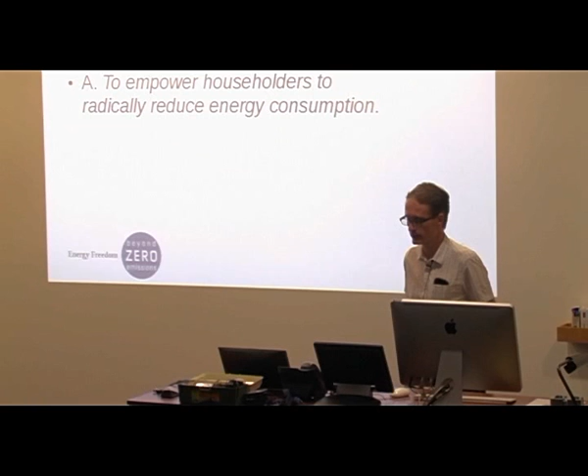We want to talk about energy freedom. First, let's consider why energy freedom. It's to empower householders to radically reduce their energy consumption.

And where does the idea of energy freedom come from? Well, it stems from the Zero Carbon Australia Buildings Plan, which was launched in late 2013. And I was lucky enough to be a contributor to that plan.

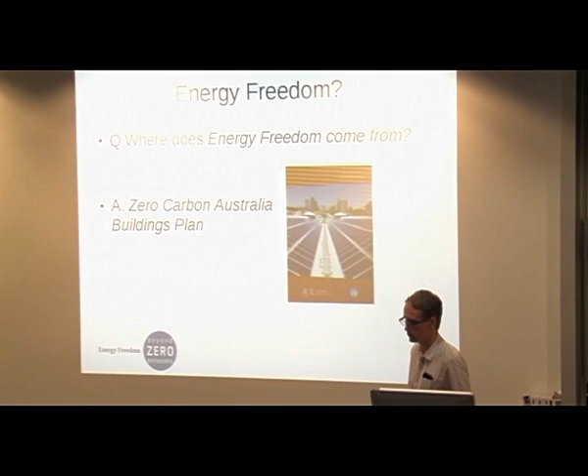In a big part, this idea of energy freedom challenges the idea of normal in terms of what I envisage as the normal householder. So I just tried to encapsulate this idea of a normal householder's attitude to energy by framing a couple of statements by a hypothetical normal householder.

A normal householder might say: I can't do much about my energy consumption, or my energy bills are largely outside of my control. Energy is something I buy from a big company. I don't really care where my energy comes from. I'll wait till I renovate, or I'll wait till I buy, to fix problem X. And lastly, of course I use gas. They're the sorts of things that a normal, hypothetical householder might say.

So, what is energy freedom? I've tried to distill it down to 6 words: net zero energy, no fossil fuels. I think that sums it up, but it may need some explanation.

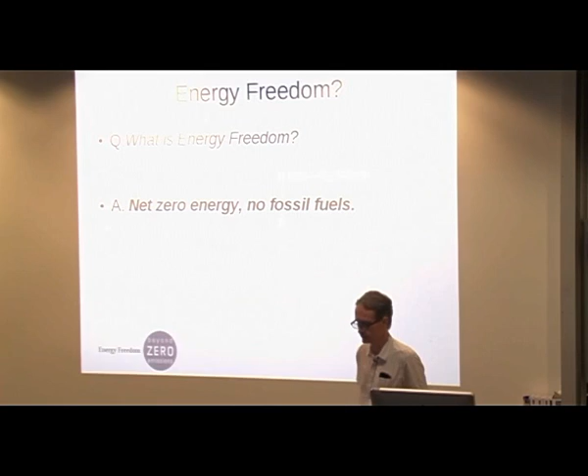Net zero energy - hopefully most of you are comfortable with the idea, but let's just be clear. A house achieves net zero energy when its annual energy consumption equals its annual energy generation. In that regard, solar PV is a game changer, because our hypothetical normal household doesn't generate any power. Until now, it might have seemed like achieving net zero was outside the realms of feasibility for most households.

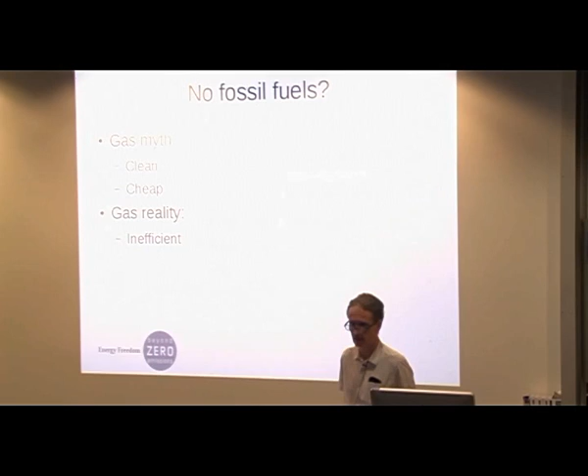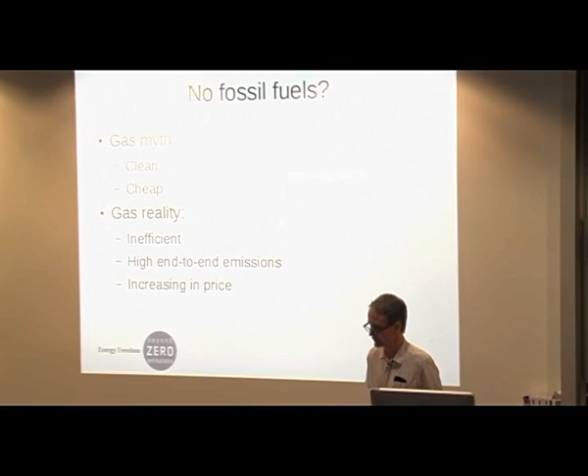The other flip side of that definition of energy freedom is no fossil fuels, which largely means no gas. The gas myth is that it is cheap and that it is clean. In my research, I consider that the reality of gas is that it is not efficient, or not as efficient as it could be. It really does involve high end-to-end emissions, and that it is increasing in price. So the reality and the myth about the use of gas in homes are quite different.

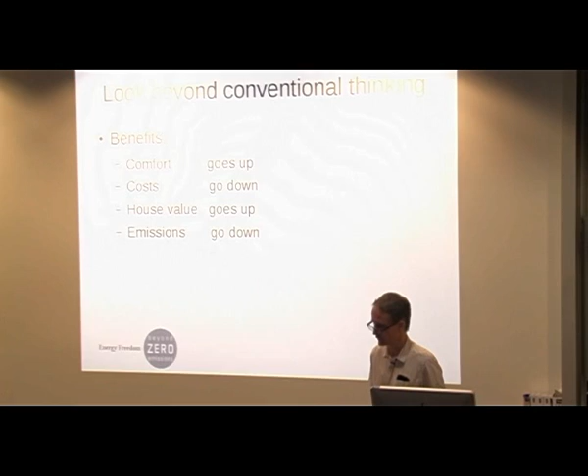To a large part, embracing energy freedom is to look beyond conventional thinking. The benefits of which are that comfort goes up, costs go down, house value goes up, emissions go down. And the other side of the coin in looking beyond conventional thinking is that money spent in achieving energy freedom is an investment, not an expense.

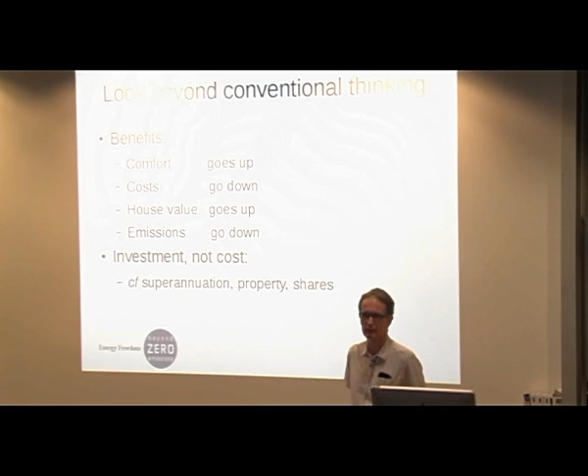Investment, not a cost. So framing this in terms of a valuable investment, like the same mindset you might apply to your superannuation or to investing in shares or investing in property. Investing in the value of the energy performance of your house is real and tangible.

So what's the context in which we are principally applying energy freedom? Well, our main target audience is firstly for existing homes and principally for owner-occupiers. That's not to say that these ideas don't have broader application, but we see the main potential for this approach to make a huge difference in this country is for those people who have their own home and can transform it radically.

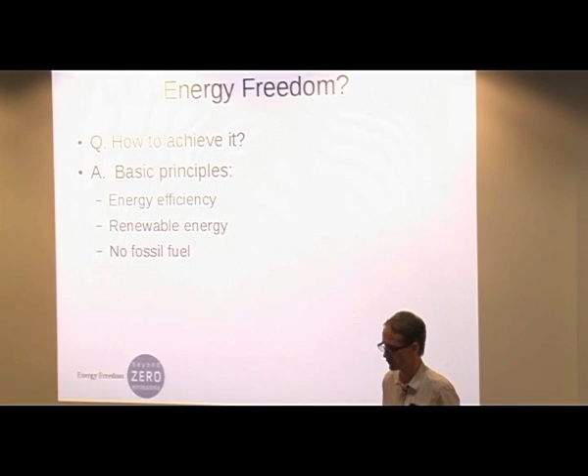Okay, how to achieve it? The basic principles of applying energy freedom are energy efficiency, the adoption of renewable energy, and no fossil fuels. Broadly we've split this into 9 areas: insulation, windows, lighting, draft control, hot water, monitoring control, heating and cooling, cooking and appliances, and solar power.

Each one of these could be a whole discussion or lecture in its own right. So in the time we have today, I'll very briefly discuss some of the considerations that apply to each of these, then look at how they all come together to improve the performance of a house. First, a caveat.

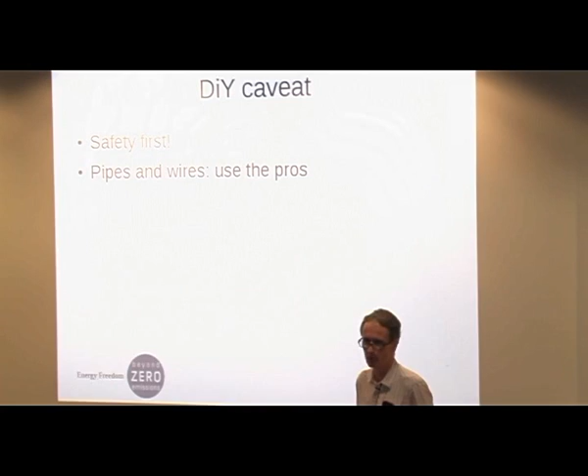BZE's discussion of all this shouldn't be interpreted as an invitation to do anything unsafe. As a DIY householder, safety comes first. If you're dealing with pipes and wires, use the pros and get professional advice.

We've discussed 9 steps. The order is largely arbitrary, but not entirely. Consider this an order you might approach it in, but it's very flexible in terms of the order you might tackle this in your own house.

Step 1, lighting. Broadly, we consider it important that householders replace any existing incandescent lights with LED lights, and this should be done preemptively because incandescent lights are very inefficient. This especially applies to halogen downlights - they are an incandescent light, and they may be low voltage in many situations, but that is not to be confused with low power. There are other problems with downlights as well.

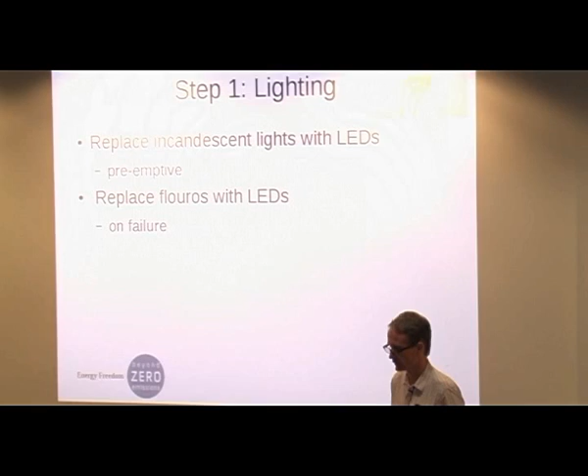Existing fluorescent lights should be replaced, but probably wait until they fail. The performance difference with LEDs over fluoros is not so dramatic that you would necessarily rip them out. Economically, it's probably more sensible to wait till they fail.

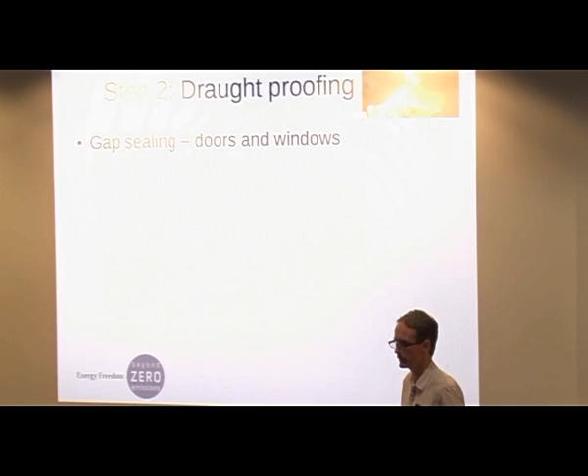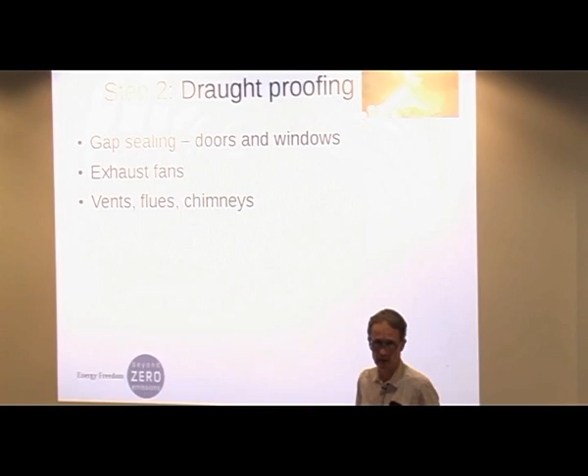Step 2, draught proofing. In my opinion, draft proofing is a bit of the ugly duckling of measures because it's undramatic, it's a bit boring, but it's surprisingly important and surprisingly overlooked. It involves the basics of gap sealing around doors and windows, proper treatment of exhaust fans, and proper treatment of vents, flues and chimneys. Sometimes this might need a professional to give you a second opinion; other times it might just be buying good stuff from the hardware store and doing the obvious things.

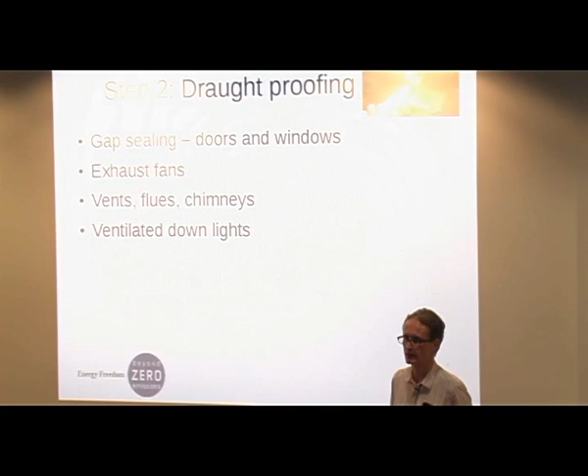Ventilated downlights are singled out for particular discussion. Often downlights allow air to pass through them to ventilate the hot bulb, and that's doubly problematic because you're allowing hot air to escape into the roof cavity, which is not a good thing in winter.

Step 3, insulation. Again, a broad subject, but I'd like to suggest that the common guidelines that buildings are renovated and constructed to are actually minimum guidelines. They're not meant to be seen as necessarily best practice.

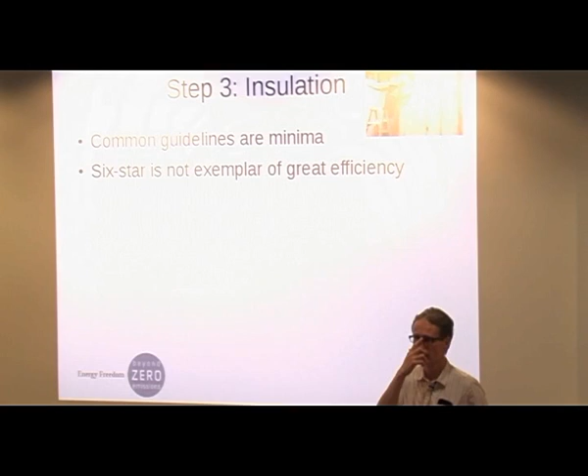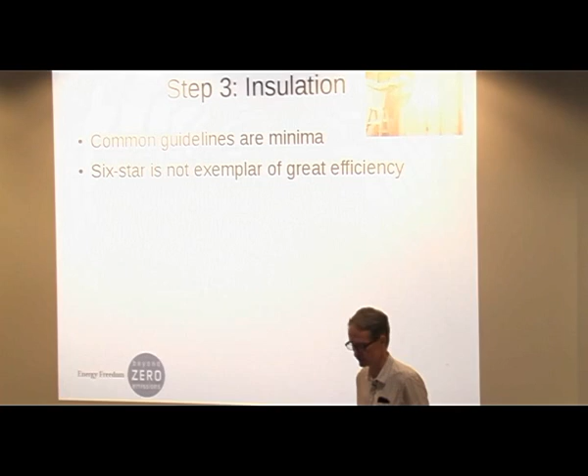For example, the common energy efficiency rating system for 6-star homes, broadly applied throughout the country, is not an exemplar of fantastic efficiency - it is a minimum standard. Don't see 6-star homes as some great benchmark of efficient homes. They are not. In most jurisdictions, a 6-star home is the worst performing house you can legally build.

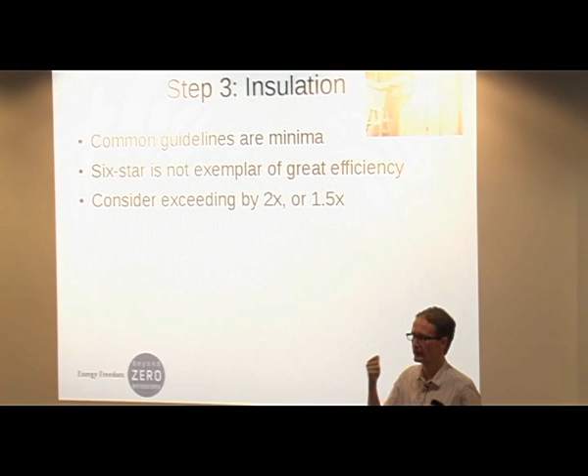So don't be afraid to go beyond the minimum standards when it comes to insulation. My personal thinking, as a guideline, is to consider exceeding the minimum standards in terms of R values by about 1.5 to 2 times. So in a ceiling where the current guidelines suggest an added R value of about 3.5, you might consider R6 at least.

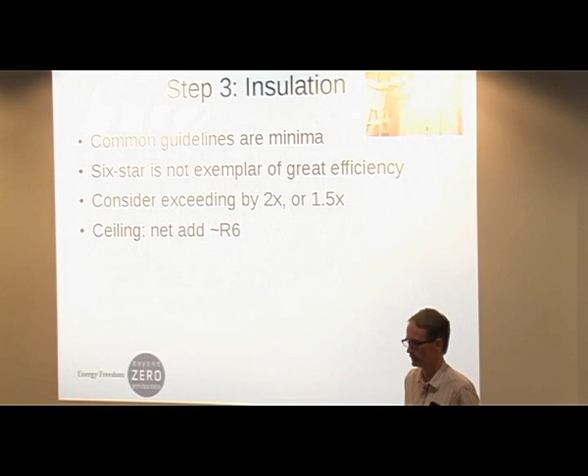In floors and walls, notwithstanding that they can often be very difficult to access and treat properly, you try for adding about R2.5 at least. That's it for insulation.

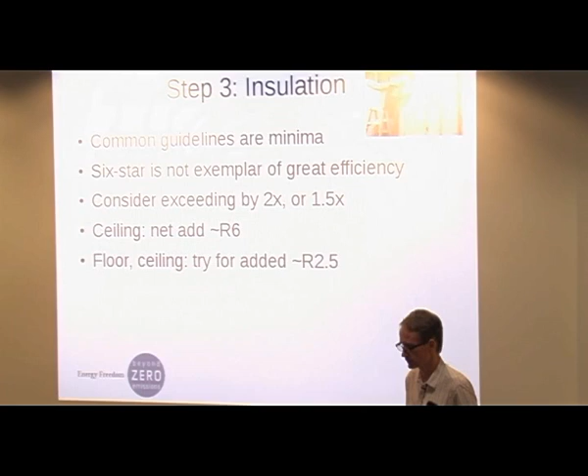Windows, in terms of their thermal performance, are really the weak link. A single glazed window pane has next to no conductive insulation capability. An important thing to bear in mind is that in a good performing house, windows shouldn't be too big.

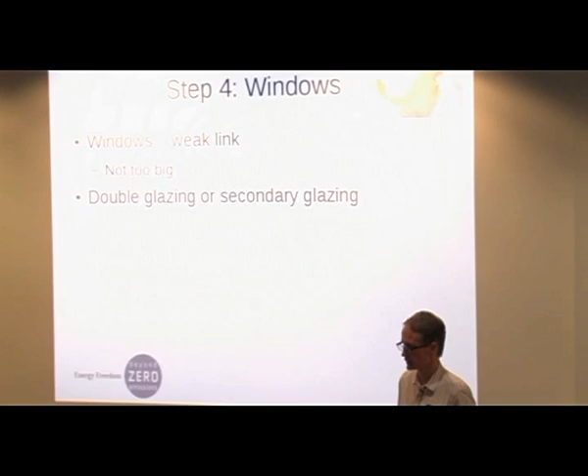Consider double glazing - if you're looking at ripping out existing windows and replacing with new double glazing units, that can be very expensive, though it may be necessary in some situations. A cheaper, practical alternative is secondary glazing, which I've got some experience with and have been very happy with, and it's much cheaper than new double glazing.

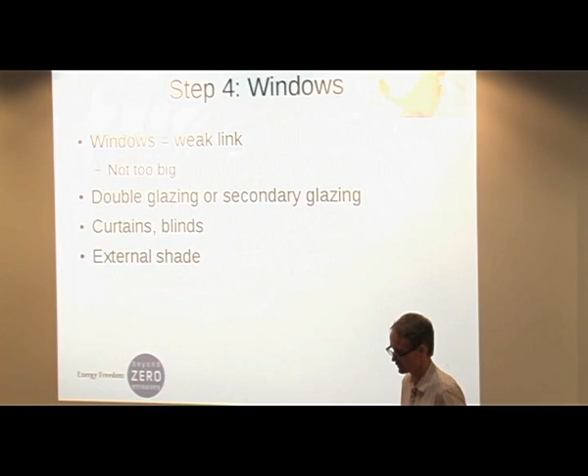Curtains and blinds are an important part of the equation in the thermal performance of windows. Don't forget that, as is external shade. These are all topics in their own right, but I just wanted to give a flavour of our advice across all these different areas.

Step 5, appliances and cooking. You might have redundant devices - don't forget to turn things off. Consider energy efficiency when buying. Most important appliance types have a star rating that applies to them. When you buy them, be mindful of that star rating and have it inform your decision. You might not always buy the absolute best performing device, but hopefully it informs your decision and helps you avoid the worst performing ones.

A particular subset of appliances and cooking is cooktops, because it's one area where often people prefer gas cooktops. BZE's advice is induction cooktops make a good practical alternative to gas cooktops. I have one, have had it for about 5 or 6 years, and I'm very happy with it.

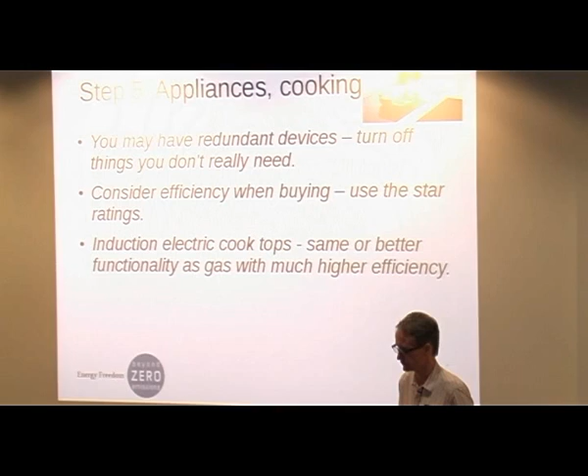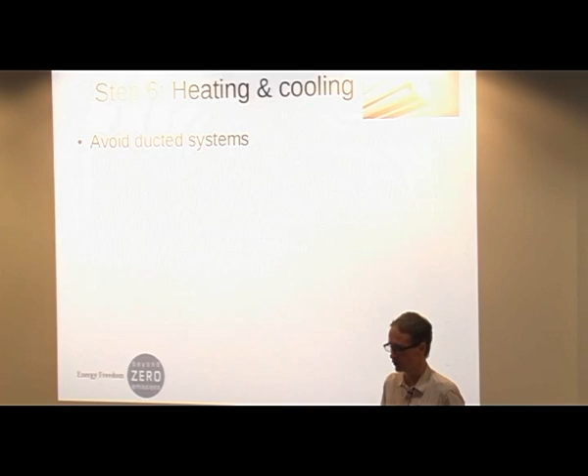Heating and cooling - our approach, our research, our advice: avoid ducted systems, number one. We tend to recommend the use of heat pump systems. In other words, reverse cycle split systems. We think they're not only good for air conditioning, they also can make very good heating systems, especially in conjunction with other improvements to your home.

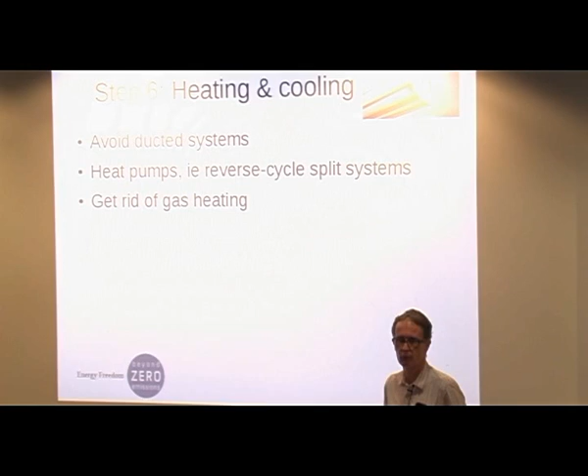Often people may have a reluctance, or a set of experiences, or dare I say prejudice, about the suitability of split systems for heating, but I challenge you to have a look at modern, efficient split systems and try them out. They really do work very well - certainly my experience. And that's all part of getting rid of gas heating, an important part of not having fossil fuels in your home.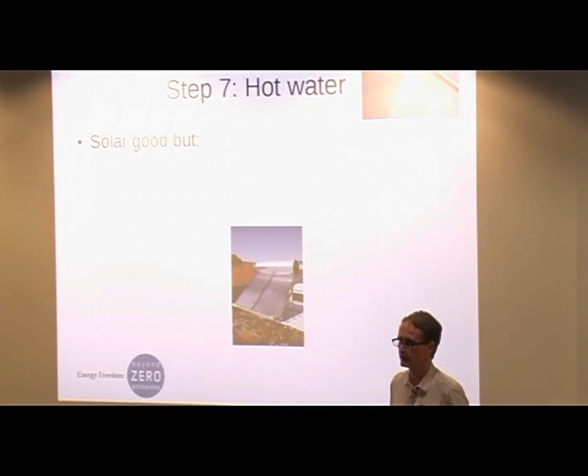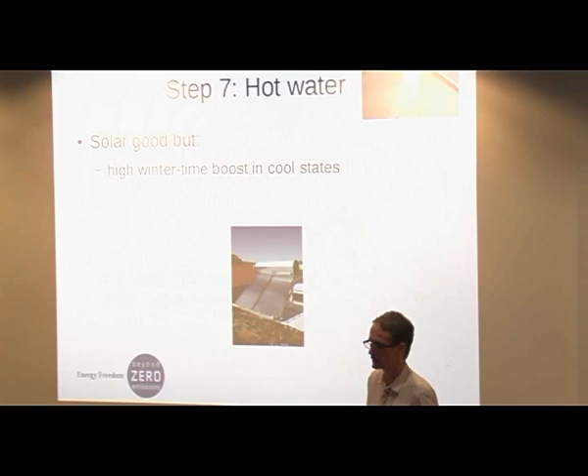Hot water - solar hot water systems are generally good. They reduce the overall energy consumption of a hot water system by at least 60%, often 75 to 95% even. But in climates like Melbourne's, they can have a high wintertime boost requirement. In other words, over the course of a year they may reduce your energy by a large amount, but in winter the energy they need can be considerable.

We tend to recommend heat pump hot water services, which look like that - well, that's one type. The energy needed for a system like that through the course of a year tends to be much less variable. So overall they use similar or even less energy than a solar hot water system, and that energy is much less variable through the course of the year. So in a climate like Melbourne, we tend to recommend a good heat pump system. In a hot climate, a close-coupled, simple solar system like that is probably going to be cheaper and easier.

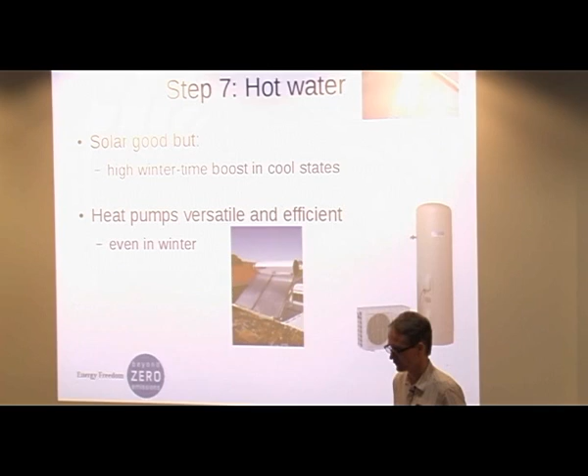There is a bit of a myth that heat pump hot water systems aren't any good in winter. That may have been the case once, but we don't think it's the case anymore for the good systems. There are still bad systems on the market, so shop around. Have a look at the ATA's efficient hot water guide if you want more information, as well as, of course, the Buildings Plan, which describes it in more detail.

Monitoring and control - it's important that householders have a good, clear understanding of their current energy use, and a lot of that's going to have to come from actually doing some measurements of your own usage. Get a PowerMate device or something equivalent and measure appliances to understand how much energy is actually still being used when you think everything is turned off. You might be surprised just how much energy is still being consumed, because there are probably other things lurking in the corners of your house that you'd forgotten about.

Set about to minimise your standby power usage, and make good use of your smart meter. All of you probably live in a home in Victoria that has a smart meter by now.

Does anyone live in a home that doesn't have a smart meter yet? Someone from Geelong - why don't you have a smart meter, Bruce? It's an interval meter. Okay, yeah, it's not smart. The smart meter rollout was supposed to have completed by now, but obviously it hasn't gone everywhere. Would you like some comments during? No, for the most part we'll wait till the end. Thanks. If smart meters are a big problem, is that something? Let's come back to that, hold that thought.

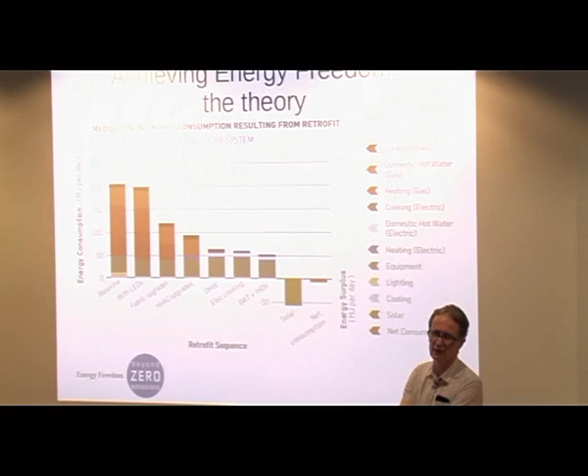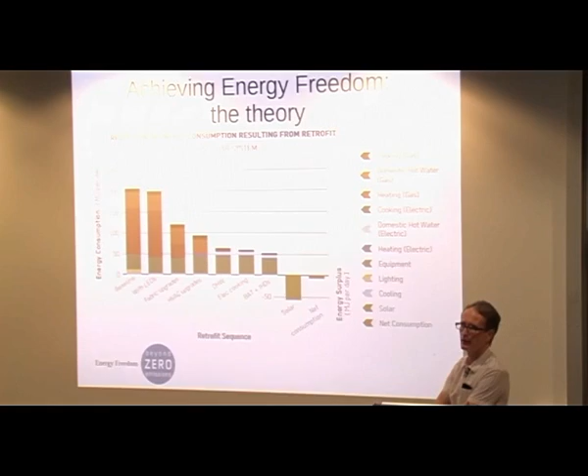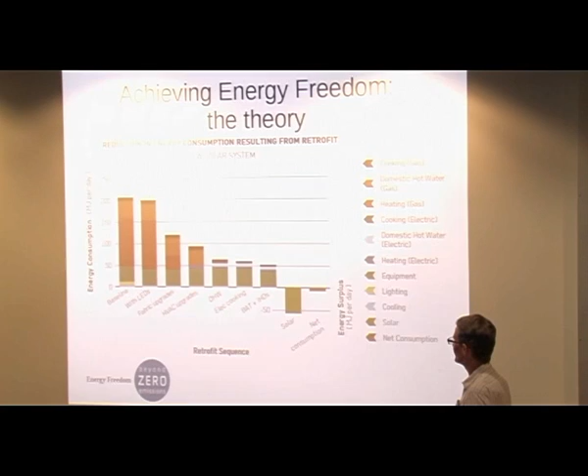So those are the 9 steps. The theory, as we described it in the buildings plan, is summarised in that chart, which nicely shows this idea of having an energy baseline in a home and having multiple steps successively applied, successively reducing the overall energy required down to a point where you've got much lower energy use in terms of megajoules per day. Then that remaining amount of consumption is offset by the solar on the roof, leading to a net consumption which is possibly slightly negative. In this hypothetical example, based on the modelling we did for the buildings plan, the house is generating slightly more over the course of a year than it consumes.

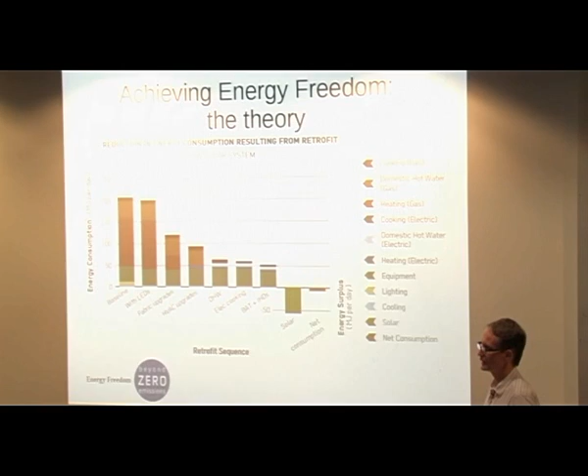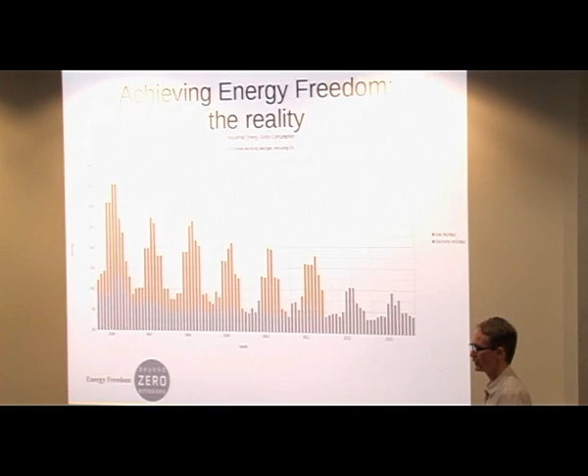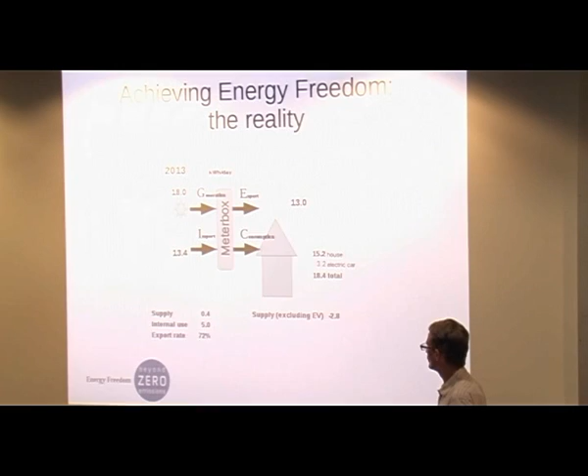The net result for the end of 2013 was what I call a supply balance of minus 2.8 kilowatt hours per day. That's 18 kilowatt hours a day of generation for the year, minus the 15.2 kilowatt hours a day consumption for the house, giving a net balance of 2.8 kilowatt hours per day in surplus. The electric car uses 3.2, so overall I'm consuming from the grid, but excluding the electric car from the equation, I'm better than net zero. So that's a real picture of a house that has done it. I hope I won't be the last.

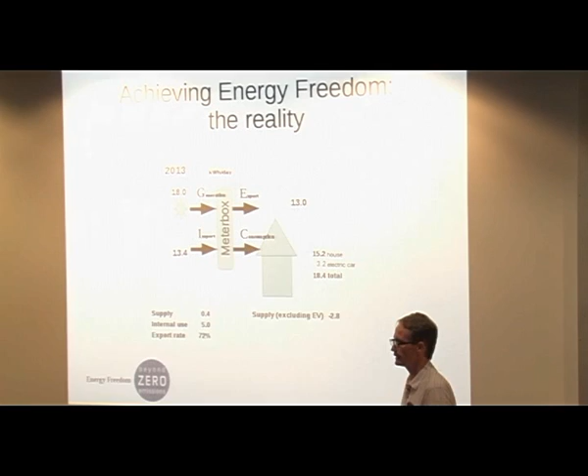I know from the course of this process of talking to people and talking about energy freedom and the Buildings Plan, there are others already out there doing this. You know, Peter's in the audience, he's doing it. Adele, who's not here, another BZE person is doing it. There's people out there starting to put this into practice, which is very satisfying.

So remember, energy freedom is net zero without fossil fuels. Look out for the book. We've taken the learnings of the BZE Buildings Plan as they apply to homes. The working title at the moment is Your Energy Freedom Home. We'll see how it comes out when the publisher actually produces the book. It's with the publisher at the moment. We hope it will be available in September.

James, do you think we should take questions now, or do you want to hold them to the end? Well, let's do both. I think if I could manage the questions to Richard in a way that will help my section too. So maybe some applause for Richard.

So yeah, I'm James. I've worked and volunteered at BZE for over 6 years now. And I helped produce the Buildings Plan executive summary and that type of thing. And while we were putting together this executive summary, we realised there's a story there. It's not just research. It actually has a real story for Australian households that if they did all these changes that we were recommending, they'd achieve something quite transformative, and it needed a name.

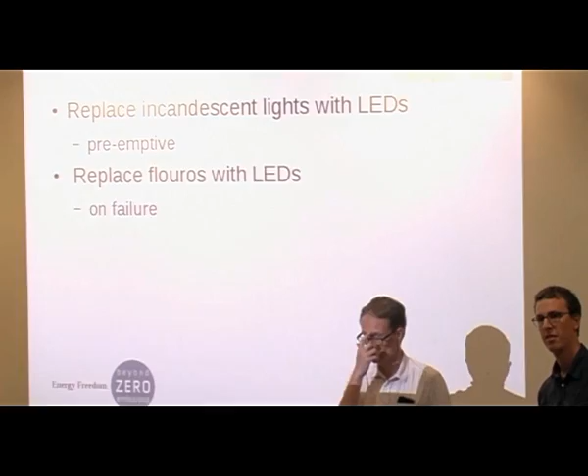Yep, so let's start with lighting. If we could just have a show of hands, how many people have changed their light globes to LEDs in their house? Some, yeah. Or maybe how many people do not have a single halogen in their house anymore? Alright, so that's maybe about 70-80%. And did anyone have any lessons or unique takes while doing the LED swap out, or was it pretty simple?

Yeah, we'll see it. The challenge I had with LEDs was, I didn't like them because they had a heat chimney effect, so I just replaced it with what was initially just going to be a series of oyster lights. But I found that the LED outputs for those sorts of lights just didn't cut it. So I went to compact fluoro lights. That did the job.

Right. Any other LEDs? We'll go here, and the gentleman in the purple shirt. On low voltage ones, I've had problems with transformers. Power demand has been too low. So I might grab a few answers and then we'll throw to Richard, if you can keep track of the commentary. And the other one is interference on radios. So we've got radios, not enough light, and low voltage.

Gentleman in the purple shirt. Dimmers on the LEDs upset them a lot. But the biggest frustration is I've got a sensor light that I just put a compact fluoro in, and they just don't like it going on and off all the time. Right. Kills the compact. Alright, we might grab two more. There and then right at the back.

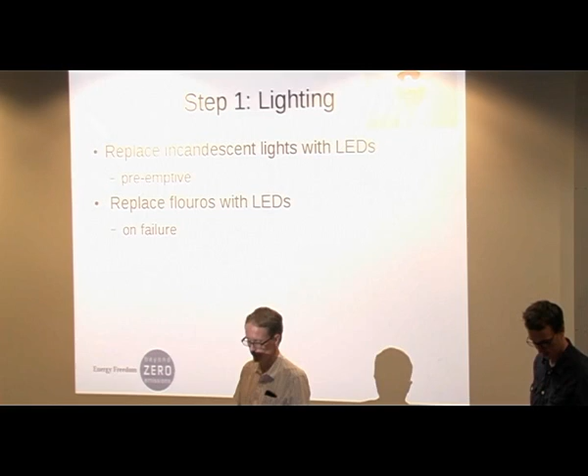Point about the colour quality, they're improving a lot. Look for a property called the Colour Rendering Index as a measure of their colour performance, and also the colour temperature is a factor in terms of the perception of light quality. So bottom line is, like with any product, there's a variety of quality out there. Go for the better ones.

The point about lumens per watt: in the buildings plan, that was in the context of a 10-year proposed rollout. We chose 150 lumens per watt as a reasonable estimate of what lighting performance would be in about 3 to 5 years. Not meant to suggest that that's what it is now. It's up to around that level in the labs already. We expect that by the end of the decade it'll be in the order of 200. But at the moment, good quality ones are in the order of 80 to 100. So hopefully that puts the buildings plan in context, that it wasn't meant to describe what's available today.

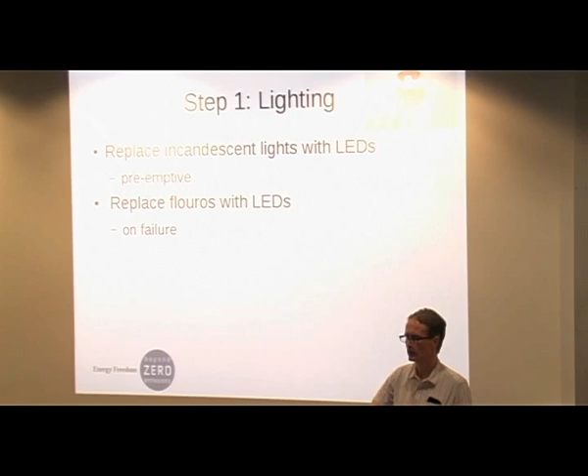Sorry, I think we had one where he tried LEDs and there wasn't enough light. In an oyster, what kind? I just replaced the halogens with a single oyster, and I certainly didn't get enough, effectively, lumens per watt, despite the blurb on the packaging. Which is exactly what you were saying.

I had several fittings with the same problem, and I had to buy from eBay the fittings where all the LEDs face downwards, all of the LEDs faced in one direction. Not Australian approved, as far as I can see. But they then work perfectly. Okay, interesting. And there's a point about the transformers.

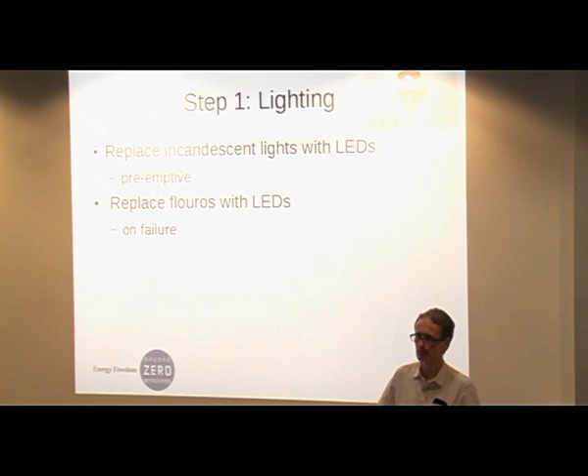Often it's good to buy a matched set of the transformer with the LED, and one of the partners of Energy Freedom actually sell them as a matched set, because it can be a problem both because the low power consumption doesn't work with that transformer, and because of the potential to induce radio frequency noise. So look out.

I think we're getting more questions, but the gentleman in the purple shirt, the question was... I have got a question. What's the difference? Oh no, this is another gentleman with the purple shirt. So one was the compact fluoros don't work well on sensor lights. It tends to cook them after 6 to 12 months.

And the other thing was if you've got dimmers and you put your LEDs in, some are dimmable. Yeah, so quality matters, just to try to look out for. Okay, we might have a couple more on LEDs, and then knowing we've got 8 more steps, we'll go on.

What's the difference between CRI and the colour warmth of the LEDs? What figure would you be looking at when you're purchasing? The colour rendering index, CRI, compared to the colour, like warm light, cool light, daylight? Sunshine is 100%. The colour temperature relates to how pure, whether it's pure white or slightly on the blue end. Up the blue end is high colour temperatures, warm is low colour temperatures. Whereas colour rendering index is more how the LED can accurately reproduce the colours of an object when it's shone on that object.

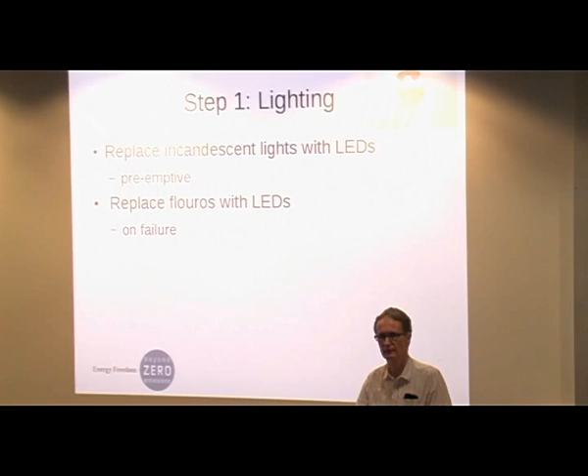Gotcha. We might go to the next step, knowing that if there's time at the end, there's so many questions on LEDs, that's kind of good. So we'll go to draught proofing, and again, just for our knowledge sharing, how many people have stuffed every gap in their house? They're pretty sure nothing's getting out. So you're about 30%, and how many people have at least done something? I'm guessing everyone. Even I've done something. Okay, so questions on how to get from doing something to getting the whole way, or lessons along that path. I hit too many questions at once for Richard, so we'll just do one at a time. Okay, gentleman over there.

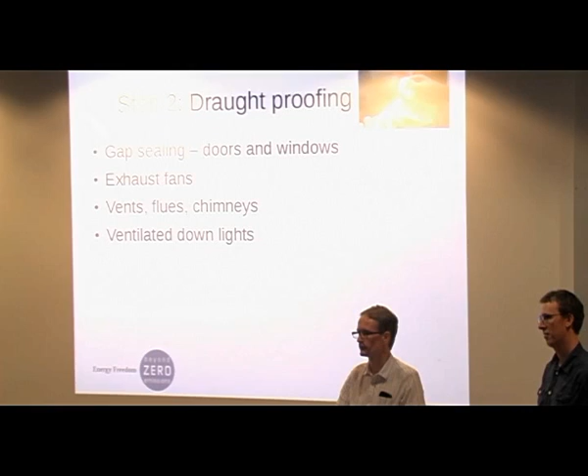I'd like to make a point regarding gaps. You can have the best house, all sealed, but people open the window or the door when it's hot or when it's cool. Behaviour change. The plan has got to be adjusted, check the family. Okay, that's a good point. It's got to be educated. You can have the best system, but unless you do your thing properly, in other words, open up at night, get some cool air in, and close in the morning as soon as you put the heat on. And the same thing applies to the shell with windows. You've got shutters outside or blinds or whatever, you do the same thing, because there's a lot of heat coming through.

We've made a 1920s period home so ventilation tight that we triggered additional condensation problems. So you just need to be aware of that and how to deal with it. In fact, your house was open for Sustainable House Day, wasn't it? I think I've been to your place. The question of condensation issues on well-sealed homes often arises. But all I'd say is that whether or not your house is well sealed, you still have to be actively engaged in the ventilation of your own home. Bad draught proofing lets you off the hook a bit, but it's still important, regardless of how well sealed it is, to be opening windows and letting the fresh air in when it's appropriate and closing them when it's hot or cold outside. So active involvement in the ventilation of your own home is really important regardless.

Up the back. Do you think that's almost another category in your 9 points, where you have such a rigid system and everything's closed up, in the absence of mechanical ventilation systems to control that? Something about driving your house, so to speak. I think it falls well within the category of draft proofing because it's all related to ventilation and the control that you have over it. When you draft proof the house, you have the potential to properly control the ventilation of your home. Without draft proofing, you don't have that control. But I agree that it's important, if necessary, to look at other measures. And two, John and another gentleman in the red.

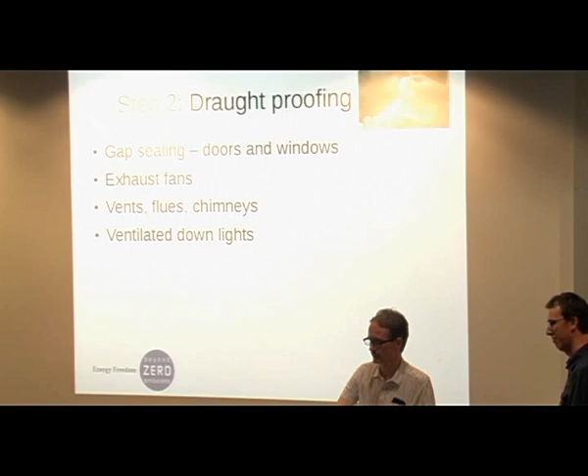The other big saving we did - we've got a 1948 brick veneer, and in the east wall there's a loo window. The loo windows they fitted back in 1948 were fixed open louvers, and going to the loo in the middle of the night on a cold winter's night was not a pleasant experience. So I ripped out the louvers, put in a single glazed window - for a window that size it's not worth getting a double glazed unit - and put an extractor fan in the ceiling with a timer switch by the door. So you go to the loo, finish your business, push the timer switch as you go out, and the fan runs for 3 minutes and changes the air. It's much nicer at night.

This is information from a specific situation in the ski club - by putting a dehumidifier into your drying room where you take out the moisture that's being generated, it saves having to run a ventilator because the air gets saturated. But it also saves your heating bill because you've got dry air. For a cost of about $500 in the ski club, we've taken nearly $1,000 off the annual energy bill by doing that.

Well done. All right, we might go to number 3. I think I'm timing it pretty well.

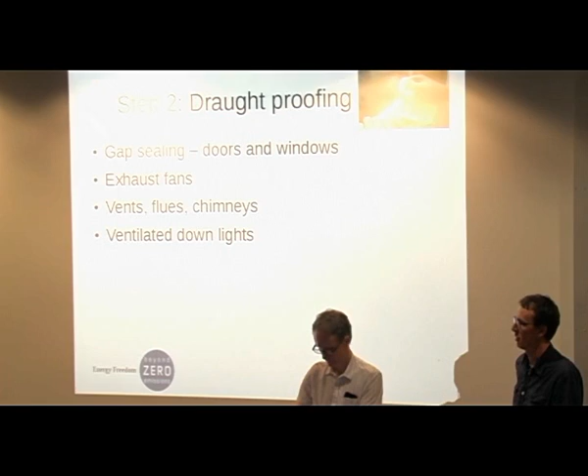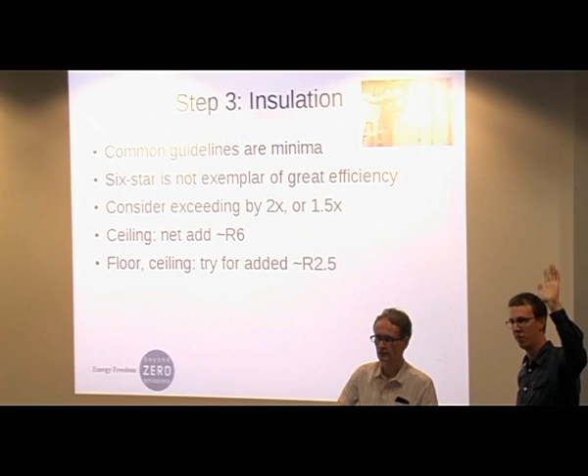And that is insulation. Everyone has some insulation - in the roof, yep; under the floor, a little bit less; in the walls, yep. That's all there is, isn't it? Just checking, there's only 3 bits. And the garage door. Okay, now we're getting tricky. So questions about insulation - from our experience a lot of it is about how to get it in the walls. Just to reiterate, we're about retrofitting if possible.

A bog standard brick veneer home from the 1960s, we're saying can generate more energy than it uses in a year and achieve net zero. So we're about retrofitting, so questions around insulation and retrofitting to your existing place.

I want to talk about my experience. When we had wall insulation done, they said there's about 4 different variants depending whether you've got tiles or tin. Tiles is much easier, they take the last row of tiles off; weatherboard's easier, they just do holes. We had the worst combo, which is tin roof and brick veneer - they had to take 40 individual bricks out by grinding out the mortar and brick. They could do it, but it was quite a nightmare, there was mess everywhere. They had heritage bricklayers that matched it perfectly - they smashed the bricks. It's good in terms of insulation, but probably weren't that happy about the actual bricks.

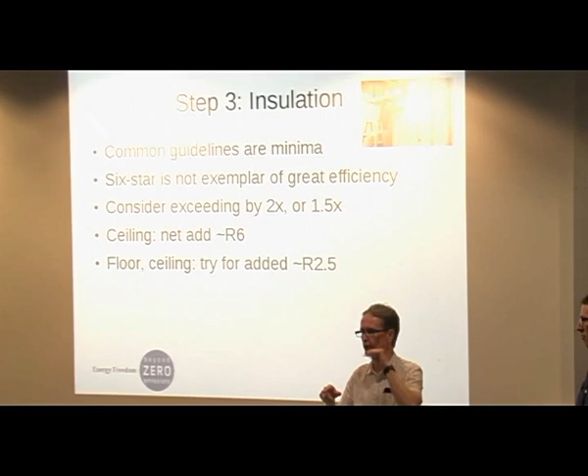But if you had the other solutions, it can be done in a day, especially with the tiles. I had pumped insulation through both weatherboards and cavity brick. In the cavity brick, they were able to inject it into the mortar - they drill holes in the mortar so the bricks didn't need to come out. So the systems vary. How readily available is that system? There aren't many people who do it - I think the demand isn't sufficient yet, so I'm only aware of one company doing it.

The main issues around it were that as it cures, it emits water vapour. So you don't want to do it in winter, because the water vapour is going to come inside and leave it moist. And if it's done behind weatherboards that are painted with old lead paint, that will lead to some bubbling.

Modern oil paints and acrylic paints are water vapour permeable, but old lead paint is not. So that was the only consideration from my experience.

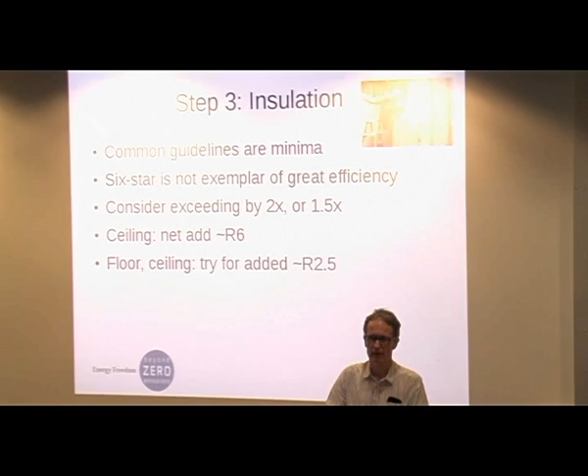How does the moisture go with power points, Richard? You need to have those external walls all dealt with before the insulation is put in. What's called a shroud goes in behind every power point or similar fitting, so the power points aren't fouled. An electrician needs to come and make sure the rating of the wiring isn't exceeded, because the thermal rating for electrical cabling is different if the wiring is fully enclosed versus in air. So there are some second order considerations when doing wall insulation.

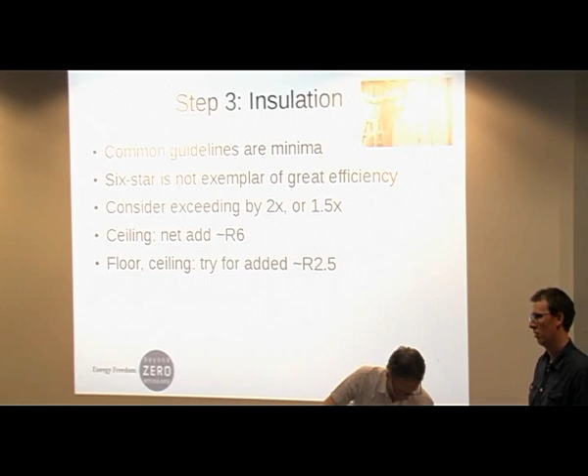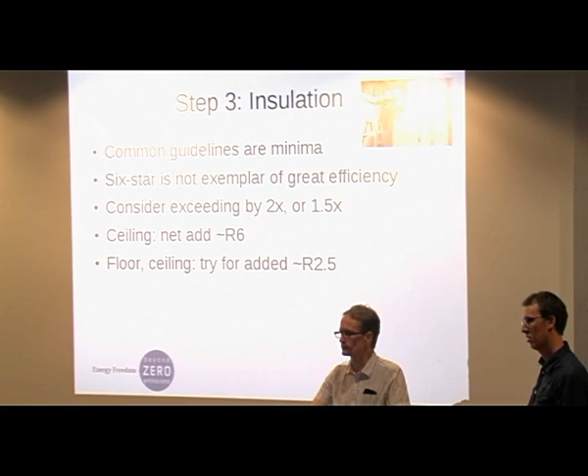Just a couple more. My build was a new house, and for thermal mass, I tried to make use of thermal mass under the house. I've got an insulated door which normally keeps the temperature inside under the house at 24 degrees. Behind the garage, I've got two 15,000 litre water tanks, and the thermal mass of that keeps it at about 20 degrees. During the day, if it's heating up at the top, the fan just sucks some of the air from underneath.

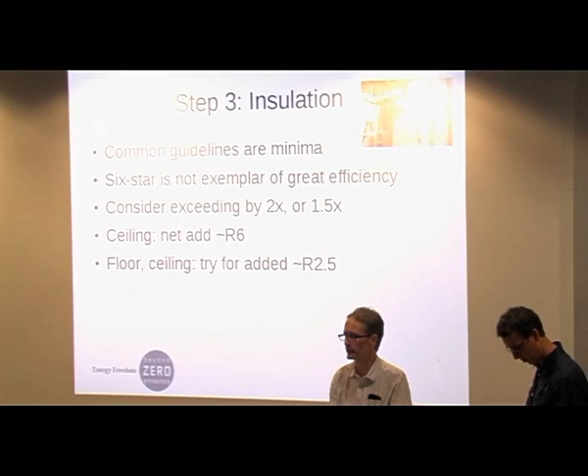So that's extra cost, but if you're doing this as a new house, just think about it. Thermal mass I've excluded from this list only because our discussion applies mostly to retrofits, and thermal mass is really hard to retrofit. My personal opinion is that insulation is much more important than thermal mass.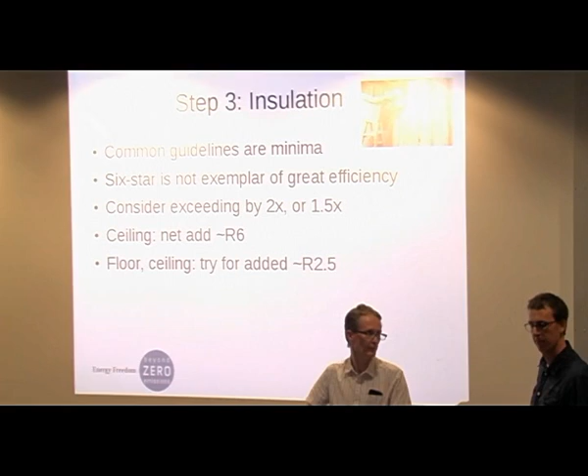I think perhaps we need to move on. Okay, sorry, we can come back.

Okay, windows. So I don't even know how to do this. Who's double glazed all the windows they want to double glaze? That's a good way to ask. So about 40% of us have double glazed all the windows we want.

Questions about retrofitting double glazing? I have no relationship with Alan, but I take exception to you saying double glazing is very expensive, because I reckon if you do it yourself, double glazing is actually quite economic, and often cheaper than doing secondary glazing. If you go to an outside major contractor to do it, yes, it's expensive, but if you're doing it yourself, it's quite different. No, I think that's fair.

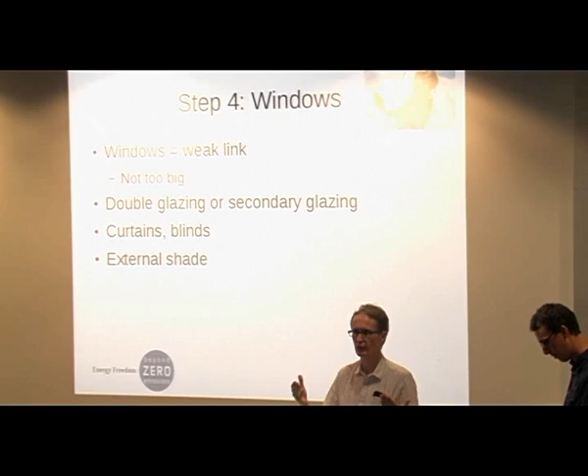For the benefit of people who aren't aware of what Robin said, for the purpose of keeping the message simple before, I've lumped glazing improvements into either doing secondary glazing or ripping out the windows and putting in new double glazed units. But in reality there's a middle ground, which is to remove the single glazed elements and replace them with sealed double glazed units, working within the context of your existing window frames. Alan Cuthbertson, who's here, runs a business that does that and does it very well. In terms of performance and cost, that approach is perfectly sound, and you make a valid point, Robin.

He's talking about a low-E solution, which they claim is as good as double glazing, but I question that. Or even laminated glass improves it - just a thicker piece of glass can improve it, not by a lot though. Because the actual U value of a single glazed window, the thermal conduction, the so-called K value of the glass, is a very small contributor to that.

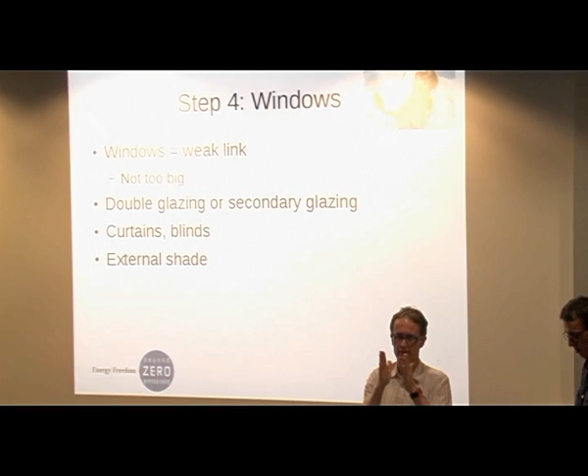Most of the net effective insulation effect of a single glazed window is from the air-glass interface. You've got two air-glass interfaces in a single glazed arrangement, and that doesn't change if it's slightly thicker glass. So thick glass doesn't really change the U value very much - it just changes the sound value.

It improves the acoustics a lot, but not the conductivity. So you really need that air gap in there of at least 5mm. Just wanted to give an indication.

I changed all my windows to double glazed, removed the old ones. It's a 24 square house, only about 12 large floor to ceiling windows. It cost me just over $20,000. Big difference in winter. Really huge.

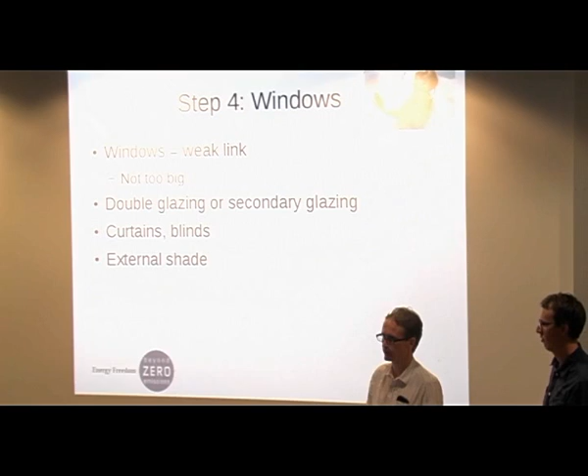My house, by way of comparison, is a 200 square metre period home with a bunch of period windows that I didn't want to throw away. I used a product called EcoGlaze, which is a secondary glazing solution. Overall, about 50 glazing elements, so like one large window might have 4 or 8 different pieces of glass in it. That cost about $10,000 or $11,000 to do the whole house, so a lot cheaper than ripping out windows and putting in new double glazing.

And I did my own secondary glazing, which is about 40 or 45 elements, for about $3,000. Basically doing the same idea as EcoGlaze. I'll have one more and then we'll go.

I went to a rental property once and they hung cafe blinds around the inside of the house, and they said that was really amazingly effective, cut their winter heating costs enormously. Cafe blinds are those sort of clear, thick plastic. Like you buy them from Kmart, they're about $80-90, and they just had them hanging inside the house on the original curtain rods. How aesthetically attractive.

Oh, beautiful. Last one: if you really want a cheap solution, the bubble wrap on windows is really good and really cheap. And for bathrooms and laundries where you don't want to see them anyway, that's true, bubble wrap is fantastic. That's good, I did that at my last rental.

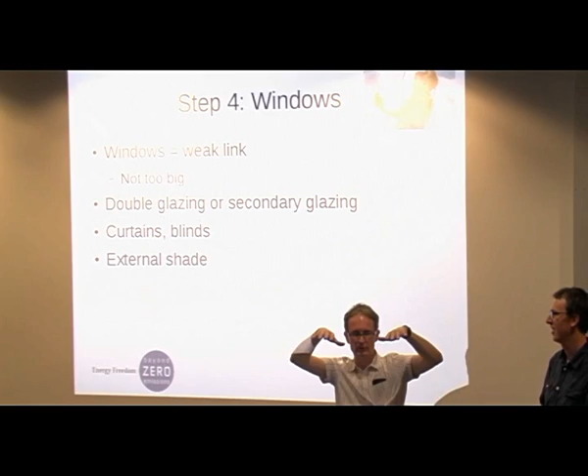I can comment on that. I have a skylight in my hallway, and I've improved the thermal performance of that with something like 15 or 18 layers of bubble wrap just sitting on top of the skylight element, which is removable. So, yeah, I concur. All right, let's go.

Let's go back to the last slide. Okay, the external shading. Has anyone used a wall garden, and what's the result? I think it's a good idea, I'd like to do it at my place. So has anyone done it?

So the question is about wall gardens. Rather than planting a tree there, which will take you 10 years or so to affect the shade, what do you do in the meantime? It's a good idea. We have serious trees, but they take time, which is what I'm trying to get at. I always want trees there, but eventually they will cover north facing and west facing walls. So in winter the sun does come through because there's no leaves. But in the meantime, wall gardens.

I saw a property that had a roof garden around its solar, because solar performs best at 25 degrees, and so in the middle of summer you can have some green absorbing some light and heat. He was saying his solar is more effective because it's brought the temperature down. So anything green we're obviously for, so plant away. It's just off the top of the head.

Appliances and cooking. Does anyone here already have induction cooktops? I think I have one. Good. Has anyone actually, this is a good question, who here has

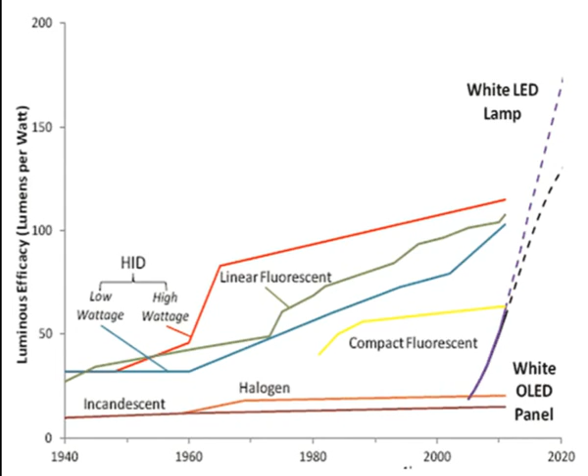Well, two issues there. I concur with the point about the capacity of supply into a multi-residential building - that certainly has to be taken into account. In terms of access to a smart meter, the point about smart meters as deployed in Victoria is that they have a wireless interface, so once set up, you don't need to access the physical device. The in-home display talks to the smart meter wirelessly, so you don't need physical access.

There might be issues about it being on a different floor and not having wireless range to it, but those are problems that can be solved. There are products that serve as gateways that bridge that gap. Does our partner in the Energy Freedom Alliance work with that? They connect wirelessly to the smart meter - do they boost the ZigBee wireless signal? There are products that do that, but I'm not sure if our partner sells those.

We've got three more topics and probably 10 minutes, then we'll do closing. So this is a massive one - heating and cooling. It's a huge part of people's energy bill, especially in Victoria. So how many people are using reverse cycle heat pumps or air conditioners as their form of heating?

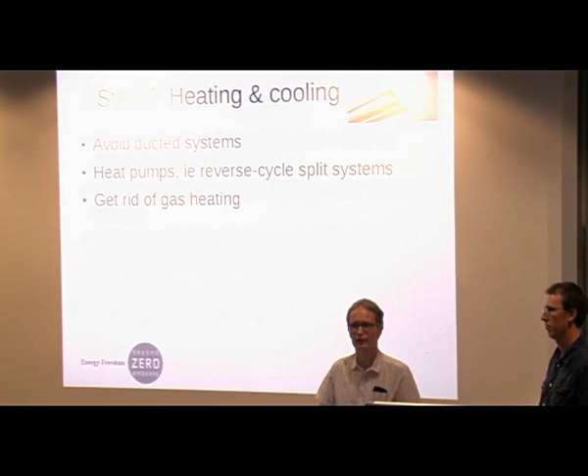I'm happy to talk to you about that. Lady in white. I've got both a ducted gas system and a gas space heater, and I discussed changing to reverse cycle with my plumber when I was having some repairs done. And he was dead against reverse cycle split systems.

So are you doing anything to educate the tradespeople? Sounds like we need to do more, but yeah, absolutely. I think someone once said people like to do tomorrow what they did yesterday. So if someone's had 30 years experience installing a certain system, tomorrow they're probably going to want to keep doing that process. So yeah, there is a big need to have the discussion.

I think you don't want to come in with a know-all attitude, but yeah, the science is kind of in on electric-powered reverse cycle heat pumps being much more efficient and cheaper to run than gas. Well, he was saying they wouldn't get hot enough. Because he would lose the trade. Yeah, plumbers. On that same topic, the air conditioning people have no concept of efficient houses as well. They didn't think double glazing or anything else made a difference.

They wanted us to have an 8 kilowatt. Yeah, they want to oversize. So it's not like the air conditioning people are the goodies, because they just want to sell you an oversized system. Well, not all of them, but many people will quote you a 5 kilowatt system per room when, if you retrofit and insulate and seal things, you don't need 5 kilowatts per room. He just couldn't grasp that making the house more efficient makes a difference to how much air conditioning you need. Insulation, double glazing, all those drafts, so he's doing that.

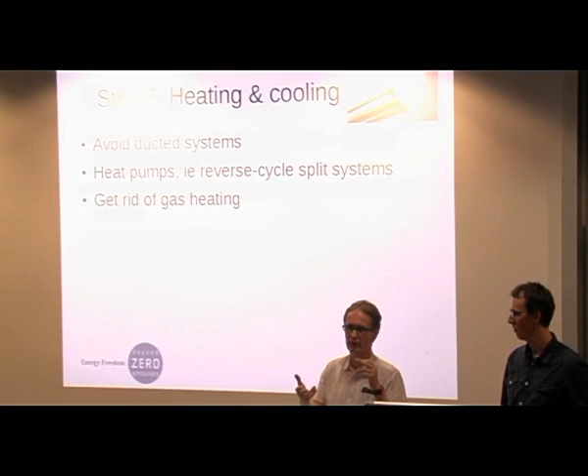Did you go for the bigger unit or the smaller unit? Much smaller than he wanted, because the home with the double glazing and the draft proofing and the extra insulation needed much, much less. My belief is, because I install air conditioners as well, a lot of people want to go the next size up, and therefore the bigger unit only has to work half as hard. That's true, but you pay for the bigger system. You pay slightly more, but it doesn't have to work as hard. But do you actually save? I think it does.

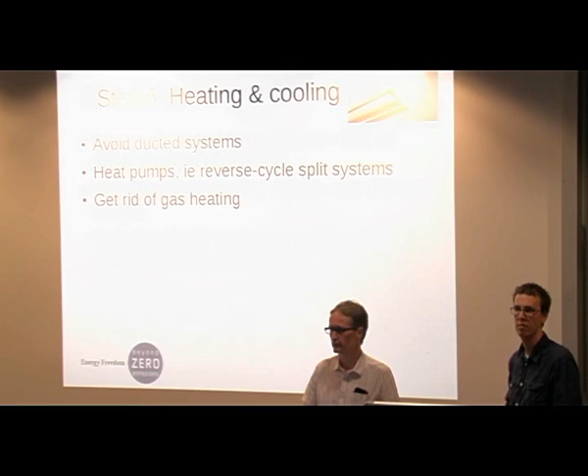But there's an inverter in my son's bedroom. I see it actually has to keep turning off and back on again, and the temperature doesn't stay stable. Whereas a smaller one would ramp down but stay on. As I see in the other room, the temperature is a flat line, whereas his does this. Because it's a big one? No, it's only 2.5 kilowatt, but in a biggish bedroom. But it's still too big for that, so it keeps turning off. The same thing would happen in a living area where the unit was bigger. So it's not always better that it's not working as hard.

You know, the new ones are inverters, so they just... Yeah, this is an inverter. It ramps down, but it can't ramp down far enough. All right. Bottom line is you match the size of the system to the thermal performance of the space. Okay. We might go just one more. Okay, cool.

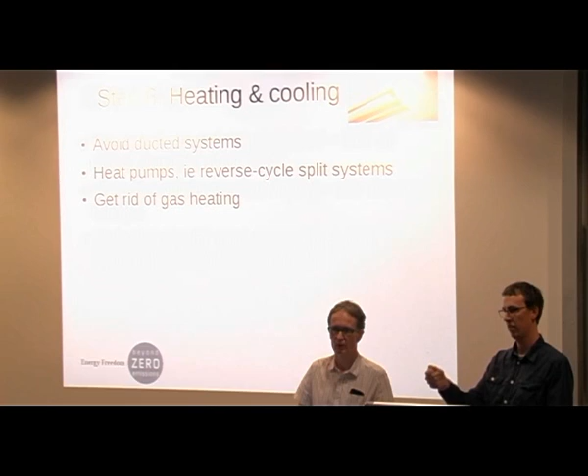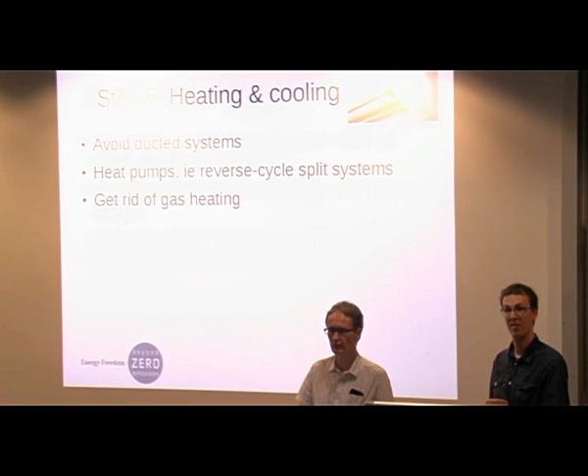Has anyone got a programmable thermostat? I think every reverse cycle air conditioner has one. No, these are the next generation. Oh, right, the smart sort. You're talking about setting different temperatures at different times of day. Yeah, and it learns your habits. A learning thermostat. Anyone have one of these? I've installed many. Are they good? Yeah, mostly commercial. They do well. They even anticipate, before a heat surge starts.

Vivian? I'd like to back up the lady's point about plumbers, and I hope you will do a sort of green offensive with plumbers, get them on side so they'll tell their success stories, because I've had the same problem. Richard, in your book, if you could have a little dialogue we can use with plumbers, because when they say things, it's very hard to be assertive. I've been to your talk on heat pumps, and I tried to persuade him about heat pumps. He told me it was crazy, impossible. I phoned up Earthworker and they couldn't do it in Sydney.

He ended up getting a gas system again, after my old one rusted, after I'd been determined for about 15 years to get an electric one, but he just wouldn't have it. He wasn't going to let me suffer so much. How could he do that, Vivian? I couldn't argue the point he was telling me. Get a new plumber. What can I say?

Well, we might have to start certifying educated plumbers with your report. Yeah, but you make a good point that there's a strong resistance against some of these ideas within the trade. Yeah. And I take your point that we need to have an engagement with them. They're not silly people. They just perhaps are not as informed as they should be about how well the new systems work.

BZE endorsed plumber. Well, we don't endorse. We could. Yeah. Okay. We'll go on because we've got 3 steps left and not much time to dance.

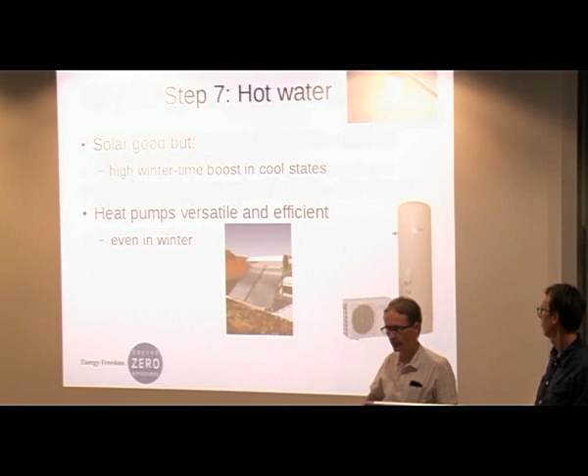The more efficient heat pump hot water service that I'm generally recommending these days is the Sanden. Sorry, is what? Sanden, S-A-N-D-E-N. This isn't the Sanden, but it looks very much like it. It has a CO2-based heat pump unit, extremely efficient, and per your point, it's really, really quiet. And I think they can be sold separate to the tank, so you might want to look at a Sanden without getting the tank bundled with it.

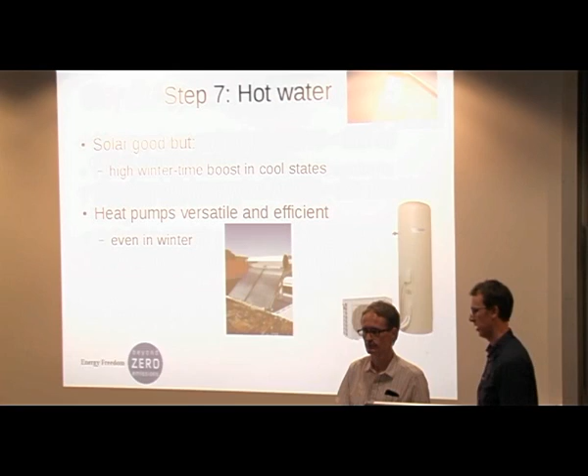Right, we might just touch the last two, I think. So that's monitoring. We kind of touched this one a little bit. And what's the last one? Solar. I think we'll go to solar because that's the exciting bit. This is a big area, though. Are there any burning questions that people have about monitoring? Well, we've got to finish at 8, Richard. People can start filling out the form. See me afterwards if you've got burning questions about monitoring and control.

So solar PV. How many people have solar here? This is what we're finding out there. Most people at this point have some solar, and it's about maximising the solar to get to net zero. But questions, thoughts about solar and using these other 8 steps to maximise the solar you've got on your roof? We have solar hot water and are considering putting in the solar PV panels.

But we have no control whatsoever with planning, and the house next door belongs to a very old lady, and we could quite easily have a 2-storey place built there. What guarantees do we have? You don't have any. Yeah, your overshadowing is a risk, and I guess you just have to plan around that. But don't worry about it, just put lots of solar in. It's a single-fronted terrace. It might be 15 years before that overshadowing happens. It might be 15 months. She's 94.